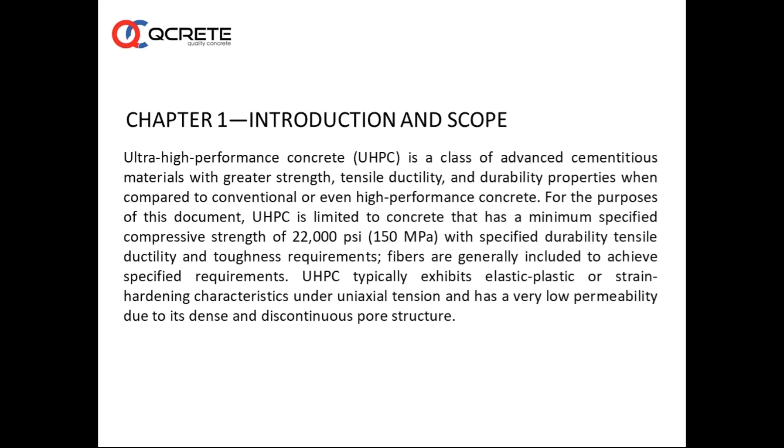UHPC typically exhibits elastic plastic or strain hardening characteristics under uniaxial tension and has a very low permeability and discontinuous pore structure. This is one of the important characterizations of ultra high performance concrete. It has almost negligible permeability. Ultra high performance concrete consists of cement, silica fume, fine quartz sand, high range water reducing admixtures, and fibers with water binder ratios probably between 0.15 to 0.25.

And many times, a lot of variations in UHPC matrices have been developed that contain other supplementary cementitious materials and sometimes coarse aggregate. Normally, whenever we talk of ultra high performance concrete, generally very fine materials are introduced in the body of concrete to make such kind of concrete. However, sometimes 8 mm down aggregates with quartz sand or silica sand are introduced to make such concretes. But in general, ultra high performance concrete consists of Portland cement, silica fume, and very fine particles of sand.

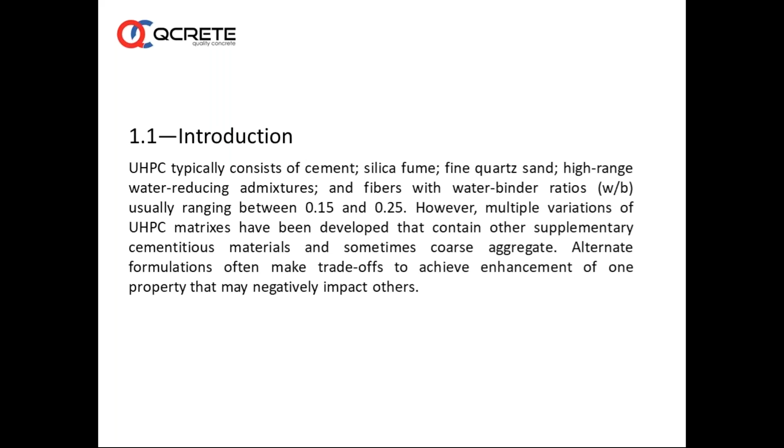And here we can say silica fume plays a major role in bringing higher and higher strength and higher performance into the concrete matrix. We have seldom seen much literature on ultra high performance concrete without silica fume. Most of the work across the globe on ultra high performance concrete is done with silica fume, and very rarely we see products like metakaolin, or in combination with silica fume, some metals replacing it to some extent. So basically, these are the components of ultra high performance concrete.

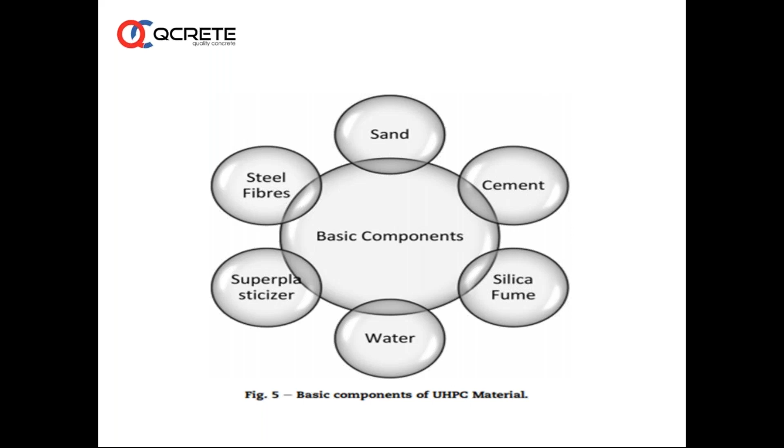So the most important characteristic of ultra high performance concrete is its homogeneity, and this homogeneity is enhanced by eliminating coarse aggregates. If you have a lot of coarse aggregates of different sizes, like in the case of normal concrete, the homogeneity may be lost. That is the reason the shift is towards finer particles, which can be packed well and which will give enhanced performance. Density enhancement is by optimization of the packing density of the matrix. This is achieved through optimizing gradation and mixture proportions between the main matrix constituents.

Ductility enhancement is done by introduction of fibers. As the matrix is very brittle, fiber reinforcement is added to obtain elastic-plastic or strain hardening behavior in tension. Typically, UHPC has fiber contents of about 2% or more by volume. The maximum fiber content is a function of the fiber aspect ratio and fiber shape, as well as production issues such as workability. So addition of fibers, basically steel fibers, brings the other dimension in the case of UHPC as far as ductility is concerned. The fibers are basically steel fibers, and there are cases where we find combinations of steel fibers and other fibers. We will talk about that.

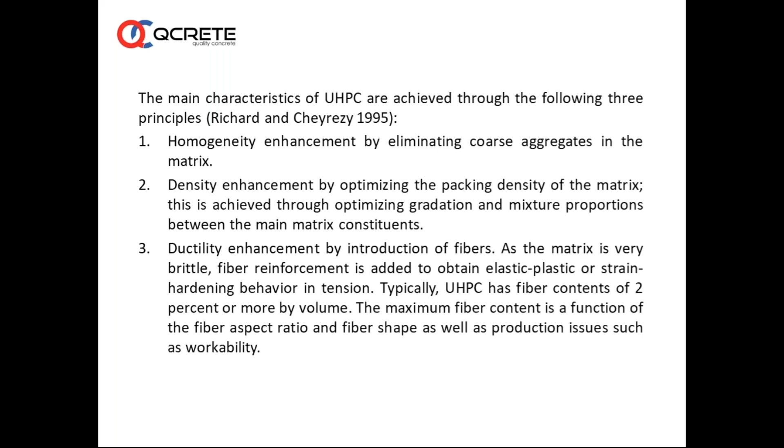UHPC, how it has evolved, how it has developed, we are going to have a very brief review of these things. Now, first we will talk about modern concrete. As a part of history, Joseph Aspdin introduced this wonderful material called cement. After that, normal concretes came into existence, and we have been using normal concretes for almost a century. Then we started using concretes with superplasticizers, that is free flow concrete, high flow concretes, self-compacting concretes. And then, as a final stage in this kind of evolution, we have moved towards ultra high performance concretes. In ultra high performance concrete itself, a lot of innovations have been made by different researchers, and different applications of these materials have also been found.

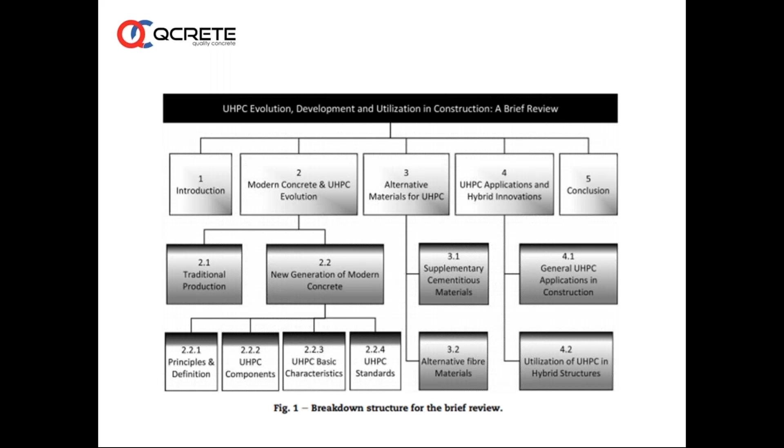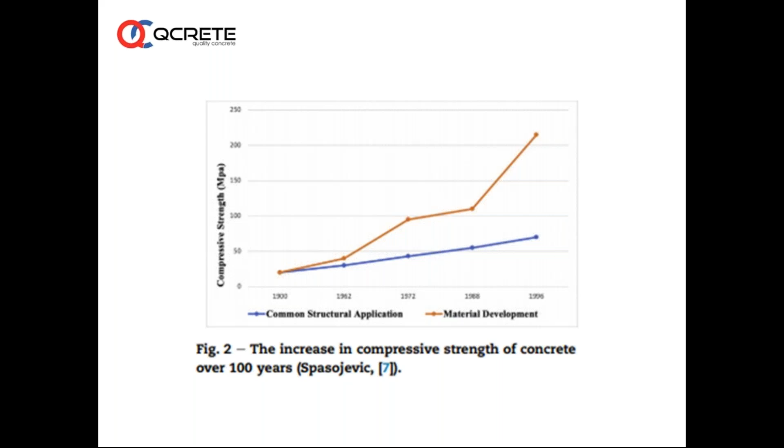The common applications now, for example, if we talk about India, I can say clearly 70 to 80% falls under M20, M25 or maximum M30, even if we are doing self-compacting concrete and such concretes, the strengths are not very high. You can see all over the world the strengths actually available are at this level, but applications are at this level. So as I said in my introductory remark, we are in infancy as far as the utilization of ultra high performance concrete is concerned, at least within the geographical boundaries of our country.

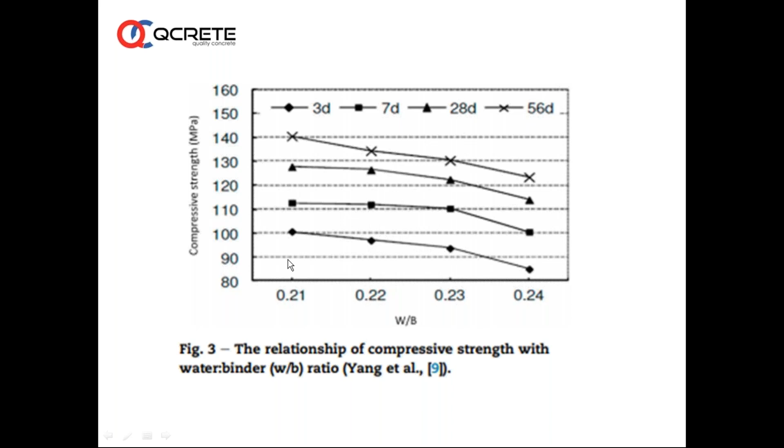Now, the major difference is the packing. Actually, in conventional concretes you have materials ranging from 20 mm, 12 mm, different sizes of sand, and then cement, things like that. Whereas in ultra high performance concrete, you have cement, microsilica or silica fume, packed well between finer particles, and the size of the inert fillers, for example sand, is very low. It can be between 0.1 to some nanometers.

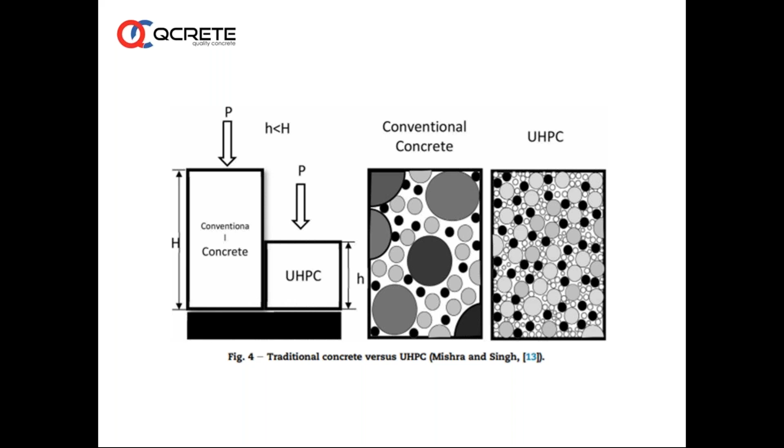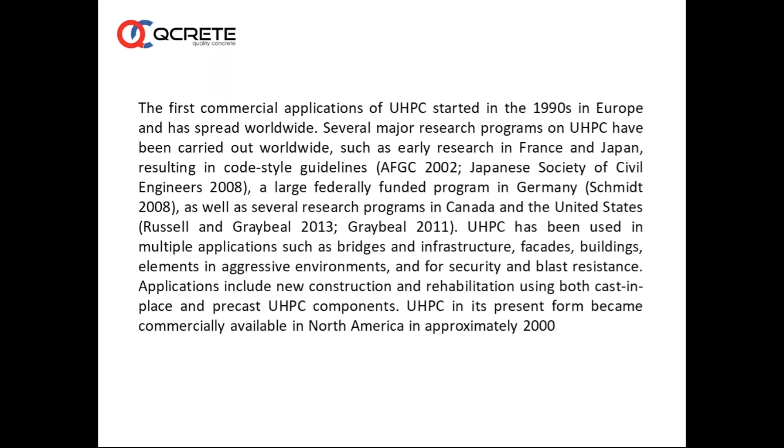The first commercial applications of UHPC started in the 1990s in Europe and have spread worldwide. Several major research programs on UHPC have been carried out worldwide: the Japanese Society of Civil Engineers, a large federally funded program in Germany, as well as several research programs in Canada and the United States. UHPC has been used in multiple applications such as small bridges, infrastructure, building facades, elements in aggressive environments, and for security and blast resistance. Applications include new construction and rehabilitation using both cast-in-place and precast UHPC components. UHPC in its present form became commercially available in North America approximately in 2000.

UHPC is still in the process of finding broader use. The objective of this report is to introduce UHPC through a brief overview of production, properties, design, and applications, and to promote further use of UHPC and integration into today's construction market. Because the cost of UHPC is high compared to conventional concrete, use should be focused towards applications that engage several of the exceptional properties of the material. Current research needs have been identified as improved design guidance, standardization, and broader material knowledge.

So, for example, the most important aspect here is actually cost, especially as far as the Indian concrete market is concerned, a very highly price sensitive market where people bargain and talk a lot about the money for M25 concrete. And if you're talking about a UHPC concrete which can last for 100 years or 150 years or 200 years, many people do not appreciate the life cycle costs of the concrete and the low maintenance costs it can bring in. So many times the initial application cost becomes vital, and hence many projects do not take off with UHPC.

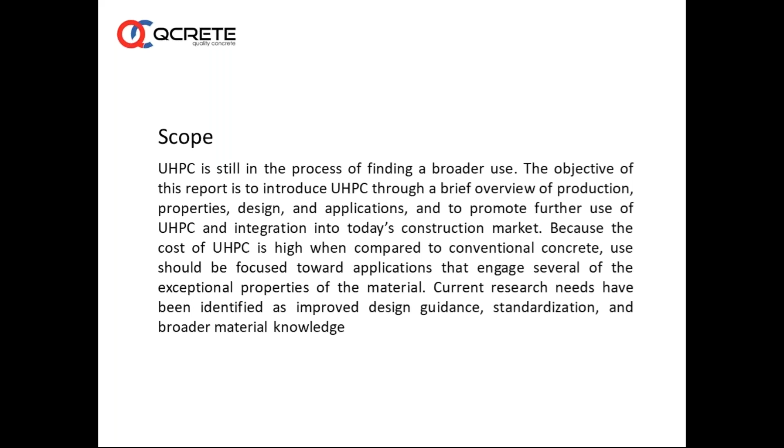The materials used to make ultra high performance concrete are similar to those commonly found in traditional concrete, and UHPC materials are selected based on their particle size to optimally pack the matrix to reduce voids between the particles. While some commercially available UHPC mixtures are proprietary, with their exact composition not reported, other mixture compositions are readily available. Some mixtures feature less common components such as silica flour, which is silica sand ground to achieve a specific particle size. The addition of high-strength steel fibers to the matrix results in improved ductility and the ability to eliminate some of the mild steel reinforcement normally found in conventional reinforced concrete members.

Here, generally, how UHPC can be done, a lot of work has been done, it is available, and we can take this as a starting point, but our interest and intelligence should be to use the locally available raw materials. There are a lot of companies abroad, in Germany, the US, etc., who have probably achieved very great things in terms of extraordinarily characterized UHPC mixtures which are proprietary, meaning they don't tell what they have done to achieve such mixes. It is proprietary, but general mixes as a starting point for a concrete technologist or researcher are easily available.

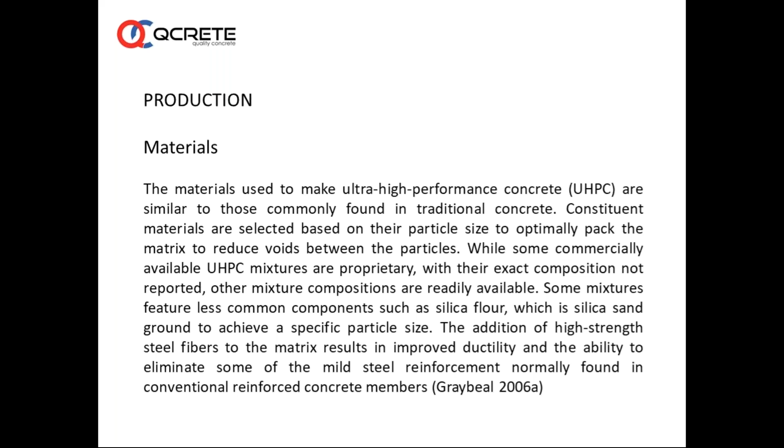The high strength and superior performance achieved with UHPC stem from reduction of void space in the matrix and a discontinuous pore structure, depending more on the material's behavior on a microscopic level than on the properties of its constituent components. Through the proper selection of components based on both their particle size and mechanical properties, the number of contact points between particles is increased, which in turn causes the level of stress transferred between particles through the paste to be reduced. So mixture proportioning of UHPC is not like conventional mix design or mix proportioning.

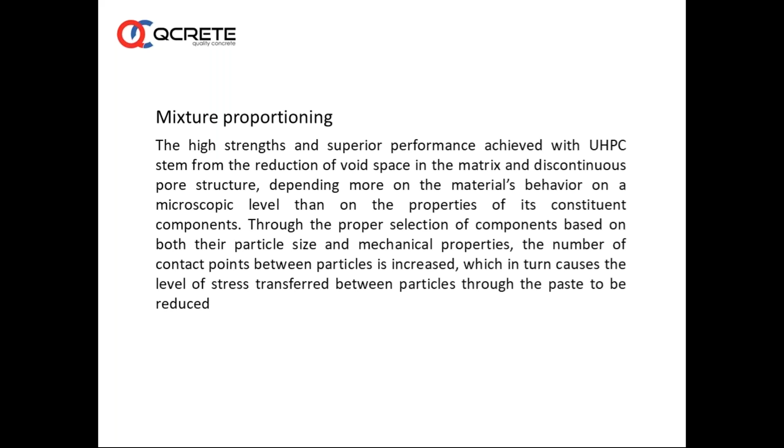You can say this is the next level of science where particle packing and packing density are given importance, and there are a lot of software algorithms developed by some companies which are, you can say, proprietary or secretive in nature, to achieve ultra high performance characteristics with the locally available materials.

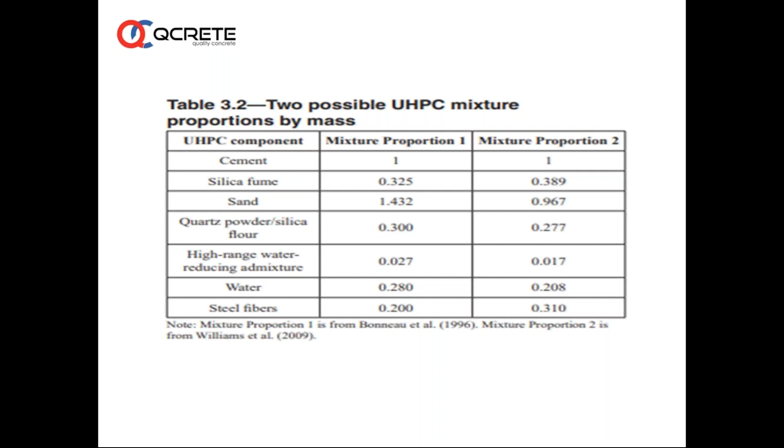So this is from ACI, where they have given two possible UHPC mixture proportions, and you can see here a huge amount of silica fume, which, as we discussed earlier, has become part and parcel of these kind of mixtures. And you have sand, quartz powder, high range water reducing admixture, water and steel fibers. So these two have been given, and these can be used as starting points for making ultra high performance mixtures using the locally available materials.

In fact, UHPC is a new form of concrete with a new type of composite construction material. Its high compressive strength and ductility are achieved by an optimized packing of fine and ultra-fine particles as well as the inclusion of steel fibers. This optimization in particular will evenly distribute all particles at the micro scale to pack the spaces surrounded by larger particles. Accordingly, a dense matrix is achieved with low permeability to provide a concrete with superior properties.

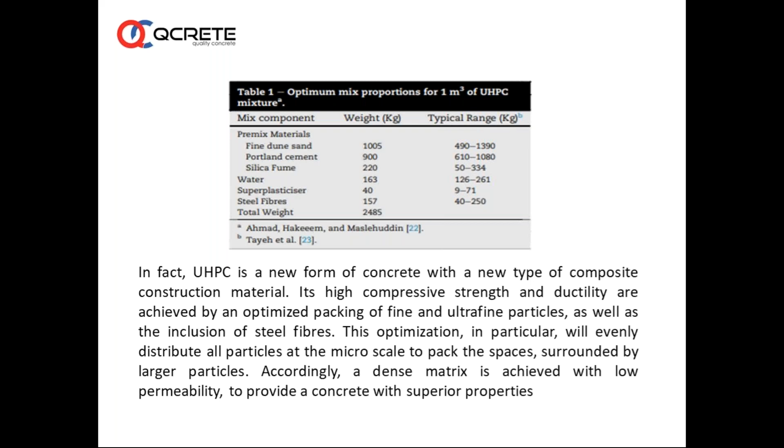Different definitions have been given to UHPC. Some researchers define the term based on its major components. For example, Farzad defines UHPC as cement-based material formed with an enhanced gradation of granular components, a water to cementitious materials ratio of less than 0.2, and a significant portion of internal fibers. Mishra and Singh defined UHPC as a special type of concrete that consists of highly fine-grained reactive admixtures, silica fume and fine quartz, fibers, and superplasticizer, while having more binder content and low water binder ratio. Azmee and Shafiq defined the term as fiber reinforced superplasticizer silica fume cement mixture with a very low water to cement ratio, characterized by the presence of very fine quartz sand that ranges from 0.15 to 0.6 mm in diameter instead of ordinary aggregate. So the definitions are different

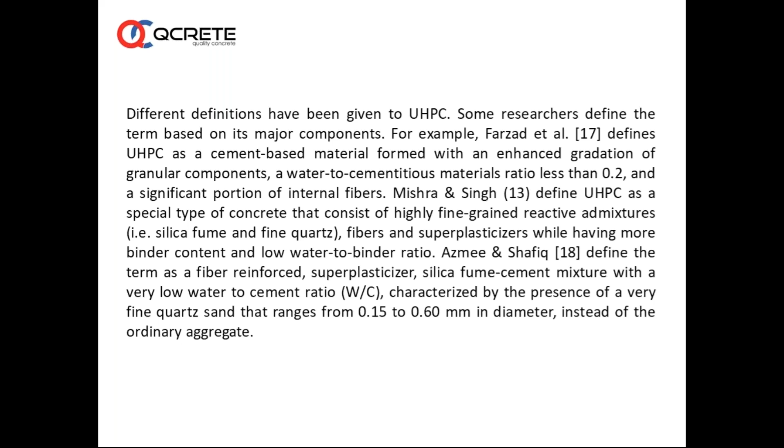as given by different people here, and we need to know that at this moment it is completely different when compared to conventional concrete, and achieving the required properties with different locally available materials will require a lot of detailed study of material characteristics, particle packing, and detailed study of all the sources of different materials and their properties. Ahmad again defines UHPC as a mixture produced by using high contents of cement, silica fume 0.1 to 1 micrometer, and superplasticizer along with very fine quartz sand, quartz powder, and fibers without coarse aggregate.

So you can see different people defining it in their own way actually. For example, Aroraa defines UHPC as a multi-scale microstructure designed material tailored for very high compressive strength, high flexural and tensile strength, high ductility. Another defines the term as an innovative composite material that can serve as a potential candidate for concrete structures exposed to aggressive environment. This is the most important point actually. The resistance to chemicals, resistance to aggressive environment is enhanced significantly when we are talking about UHPC. The durability also is improved proportionately.

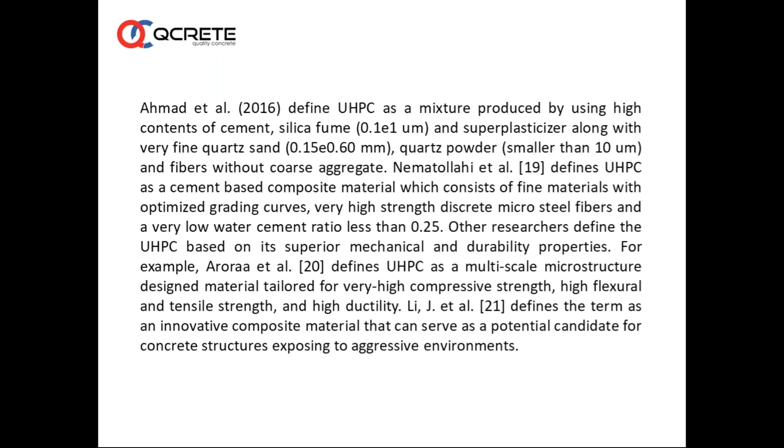The matrix of UHPC is optimized for particle packing, that is, the mixture proportions of typical components such as sand, silica fume, and cement are optimized to achieve the densest packing possible, as investigated by de Larrard and Sedran. Another unique aspect of UHPC is that some cementitious material particles may not take part in the hydration process, but merely serve as fine aggregate in the overall matrix. It is common for 30 to 50% of the cement to be hydrated in UHPC due to the lower water content. So, due to the lower amount of water available, as we are using a very low water cement ratio, some of the cementitious products may remain unreacted in the body of concrete, and they can remain forever in that state.

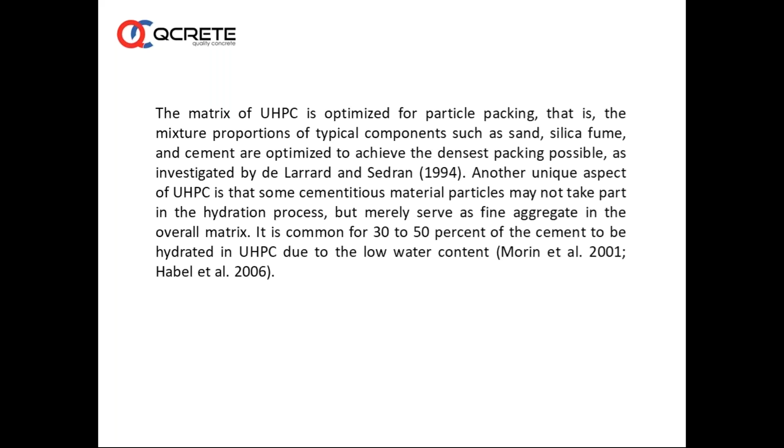We could come up with a definition which combines UHPC major component and superior properties along with the basic technologies behind the UHPC production. Thus, UHPC is a new generation of cement-based construction material tailored for very high compressive strength, high ductility, sustainability based on micro-scale optimization of fine and ultra-fine aggregates, lower water to cement ratio with added superplasticizer and reinforcement with high strength steel fibers.

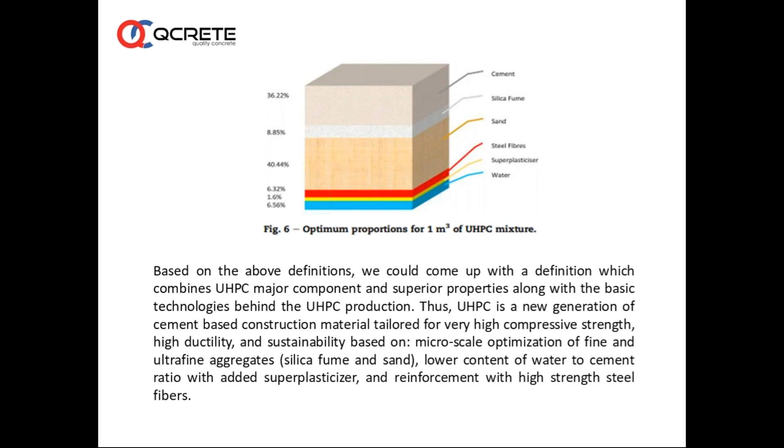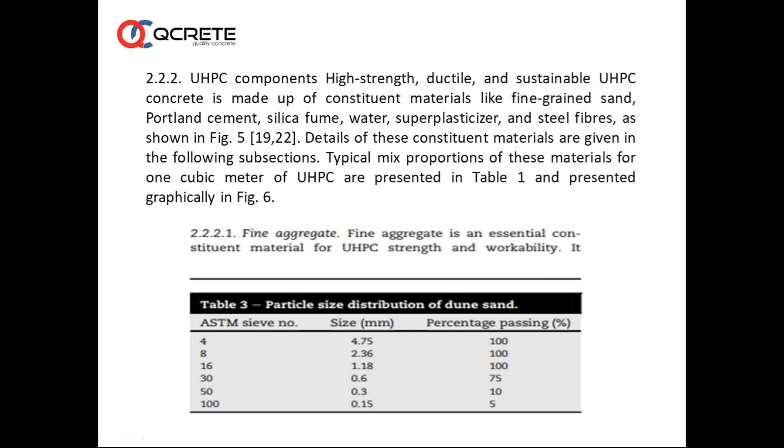So you can see here one of the particle size distribution requirements made by one of the scientists actually. Silica sand is expensive for UHPC. Quartz sand, on the other hand, is available, but it needs to be crushed from coarse aggregates or natural rocks. Natural sand, in contrast, can be used easily and effectively as a fine aggregate for UHPC. And in Saudi Arabia, they have used dune sand, which is easily available.

And this also shows some research on the relationship between compressive strength and silica fume content. As the silica fume content goes up to 15% here, the compressive strength breaches the mark of 110, 120, which is required for UHPC. That is why silica fume has almost become an integral part of UHPC.

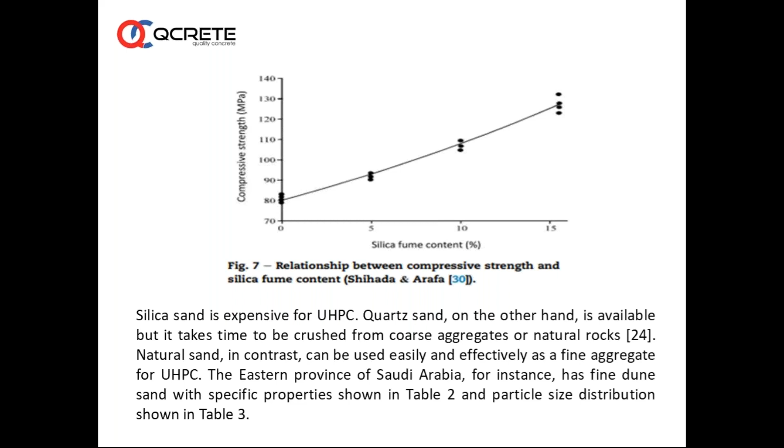Portland cement. Ordinary Portland cement is the primary binding material. When used with water, it hydrates and becomes solid and binds all aggregates of the UHPC concrete. It is produced mainly from two basic raw materials. We know all these things actually, which are basic, but the content that is used in ordinary concrete cannot be compared with this one. Almost you have double the cement content in the UHPC.

The part of the cement that is not hydrated due to the small proportion of water will be used with other aggregates for packing optimization. So from a common man's point of view, cement being used as a packing material is unheard of, but in UHPC, if a lot of material is unhydrated, it will be working as an inert filler and it will be filling up the spaces between the larger particles, and it participates in packing optimization.

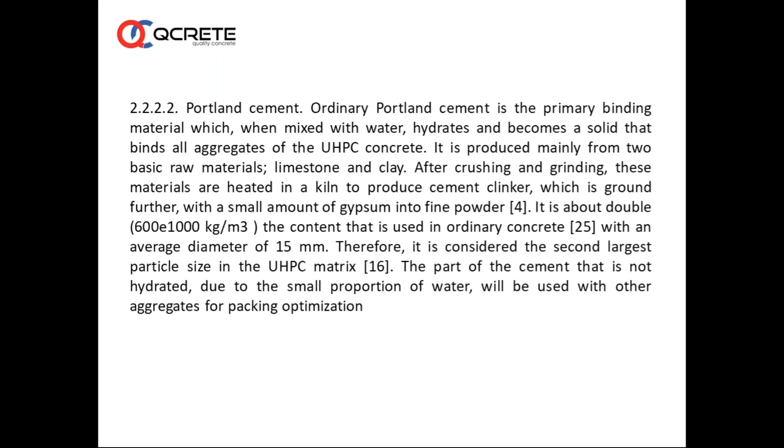We have spoken a lot about silica fume so far. Silica fume or microsilica is a waste byproduct material coming from furnace smoke of the production of silicon metal and ferrosilicon alloys. The rounded particles of silica fume have a diameter of 0.15 micrometers on average, and most of the particles are less than 1 micrometer. Thus, they are the smallest particles in the UHPC matrix, 100 times smaller than cement particles. This is why it is considered an excellent filler to fill the voids between larger particles in the UHPC matrix. Using this ultrafine material leads to a dense matrix which enhances the mechanical and durability properties of the concrete.

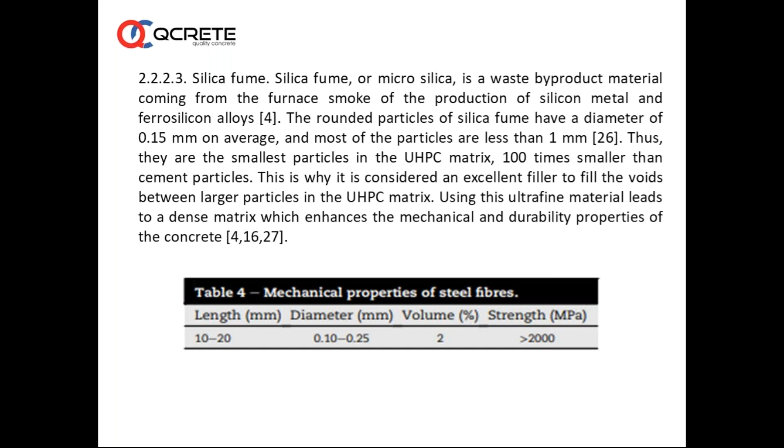So microsilica, because of its shape and size, acts as a filler. Also, it reacts with the other hydration products, making durable, high strength and extraordinary concrete as the amount of microsilica goes up in the matrix. So silica fume can be used in UHPC mixtures within a range of 150 to 250 kg, which is huge compared to a conventional concrete. In conventional concrete, we are all aware microsilica is used between 5 to maximum 6 or 7% normally. So here it is used between 10 to 30%.

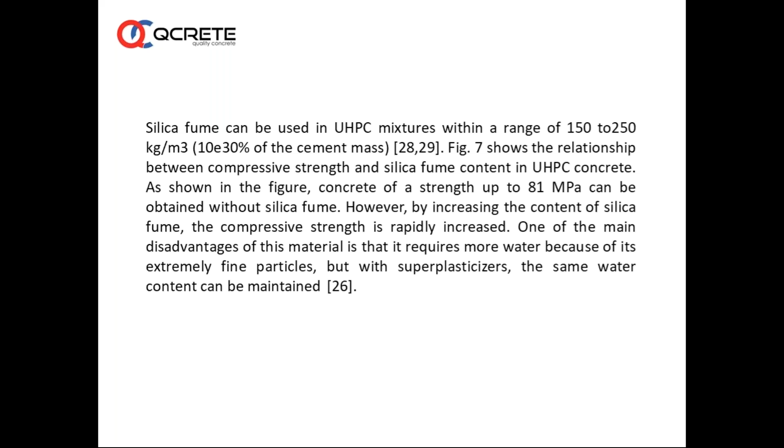But the advantages are plenty. Even though you can make concrete without microsilica and get some high strength, many times in our experience, we can say microsilica is like an insurance. Whatever happens, if some mistakes happen during production or during transportation, microsilica will take care of that and give additional strength, as a strength boosting material as the age goes on, and at 28 days and beyond it will also improve the strength. It is a material accepted worldwide for use in high strength concrete and also ultra high performance concrete. So even though it requires more water or more admixture, it is a product which is used worldwide wherever high strength, high chemical resistance, low RCPT values are required.

Water is an essential material for making UHPC. Potable water is suitable, as is usually used for ordinary concrete. The quantity of water must be enough to complete the hydration process and to maintain workability. The minimum water to cement ratio for ordinary concrete is about 0.4 to 0.5, including water for workability. The amount of water is inversely proportional to the compressive strength.

If water increases, the strength decreases. Excess water not used in hydration would develop voids in the concrete mixture, which would increase permeability and reduce the strength of concrete. In UHPC technology, using a high-range water-reducing admixture helps to maintain workability without the need for excess water. Accordingly, the water-cement ratio will be reduced to an optimum level ranging from 0.14 to 0.22. This leads to increased compressive strength. So 0.14 to 0.22 are earlier unheard-of water-cement ratios, but in UHPCs we use 0.14 to 0.22.

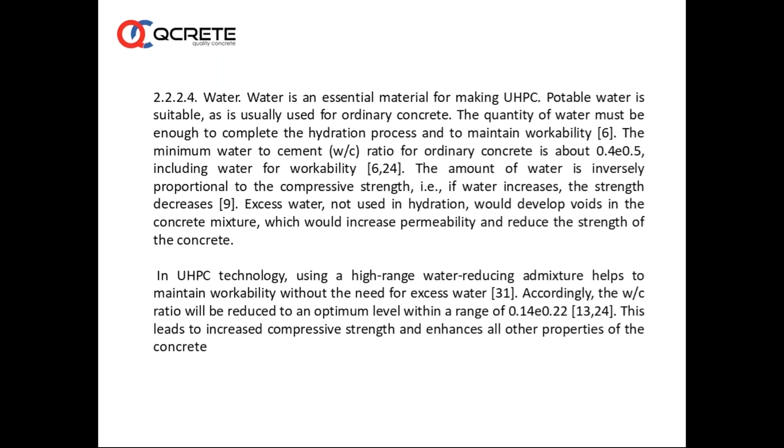In UHPC, you use high range water reducing admixture. Now, polycarboxylate ether based admixtures are available. Extremely advanced admixtures are available, which can be used in very high dosages without affecting the setting time of concrete. Even at very high dosages, these admixtures are tailor-made in such a way that they don't disturb the hydration process or setting time, and hence they are part and parcel of ultra high performance concrete.

The reduction of water cement ratio to 0.14 to 0.22 is possible only because of such extraordinary water reducing capabilities of polycarboxylate ether based materials or polycarboxylates.

Concrete without reinforcement is liable to fracture since it is brittle in nature and cracks cannot be stopped. Therefore, steel fibers are used to reinforce the UHPC matrix to provide better resistance towards crack generation, a better tensile strength and resistance to fracture. Steel fibers are characterized by their shape, diameter, volume, orientation, and strength. The mechanical properties of steel fibers are also there.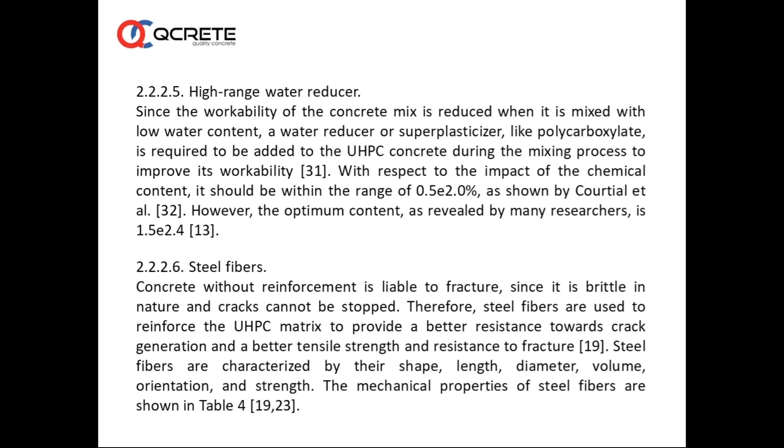Deformed fibers such as hooked end fibers are much better than straight ones. Also, long fibers are better than short ones. With respect to the fiber's volume, an increase will improve ductility up to a certain limit, beyond which additional content will not be beneficial. A content of 1 to 2% of the expensive fibers has been proved to be enough to achieve the required properties with wise economy. Also, fibers with a good orientation along the direction of the tensile load lead to good homogeneous distribution of fibers, which will improve the mechanical properties of concrete.

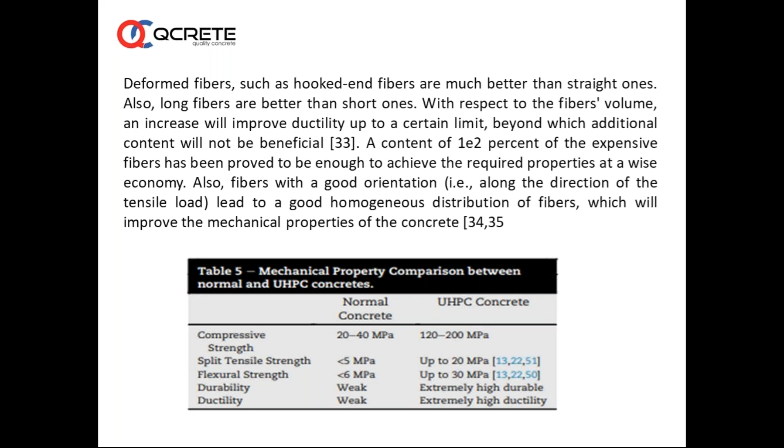Supplementary cementitious material. What is the role? We know when you are using fly ash, workability and setting time are increased, and heat of hydration is reduced. GGBS also increases workability, silica fume decreases it. Hardened property strength is increased when you are using all these materials, and permeability is reduced; when you are using silica fume, maximum reduction takes place. Chloride ion resistance and sulfate ion resistance are enhanced significantly, and if you look at the particle size, silica fume is the smallest particle.

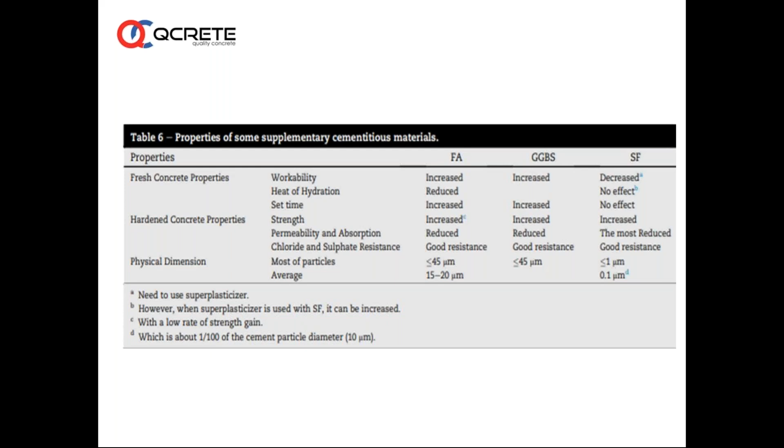Whenever we are using supplementary cementitious materials, and since they are part and parcel of ultra high performance concrete, the overall durability, that means characteristics such as permeability as measured by DIN 1048, chloride ion resistance as measured by ASTM C1202, resistance to sulfates, drying shrinkage, abrasion resistance, freeze thaw resistance, long-term durability, long-term strengths, all are improved by introduction of these materials along with a containment of water cement ratio to less than around 0.21.

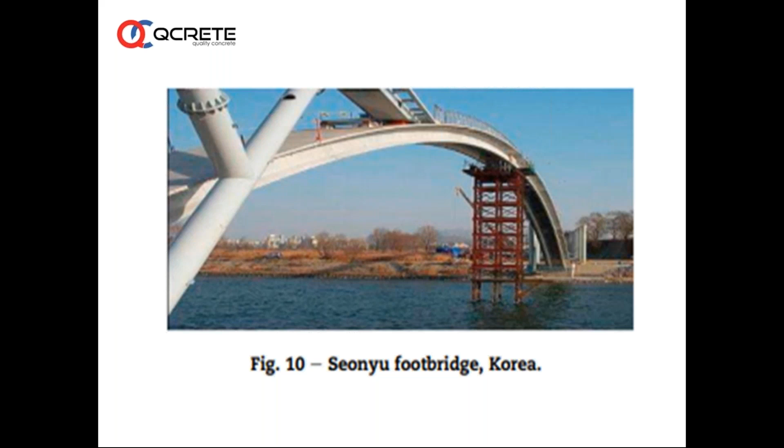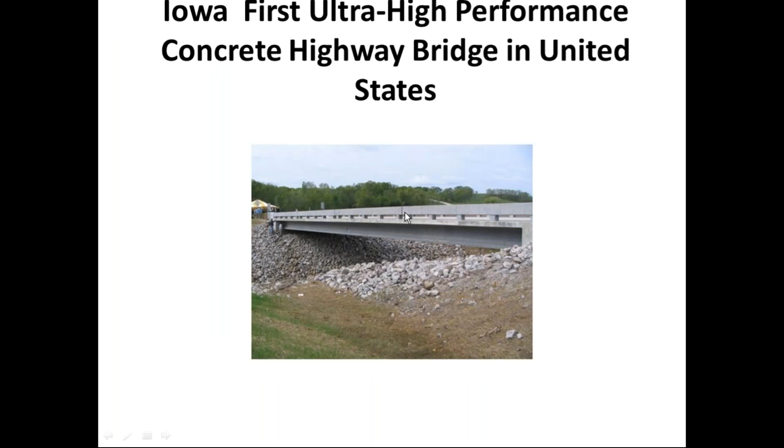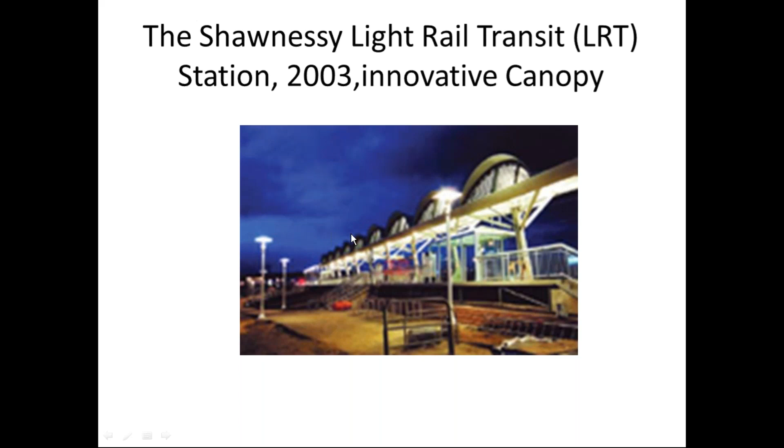So has UHPC already been used somewhere? Yes, there are a lot of examples. A footbridge in Korea. This is the first ultra high performance concrete highway bridge in USA, with approximately 120 MPa strength. Again, a Shawnessy light rail transit system in the US. A very innovative canopy has been made by using this ultra high performance concrete. And you have a lot of other applications that can be done by using ultra high performance concretes.

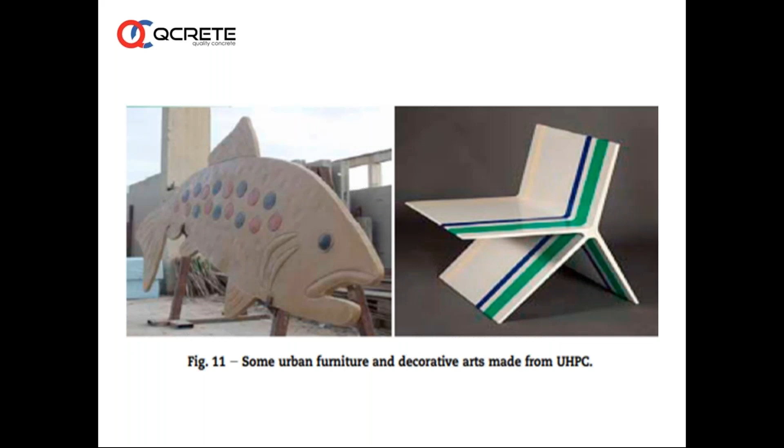You can reduce the thickness of structures. You can reduce the column thickness. You can reduce the steel. You can really take the reinforced construction to the next level by using UHPC.

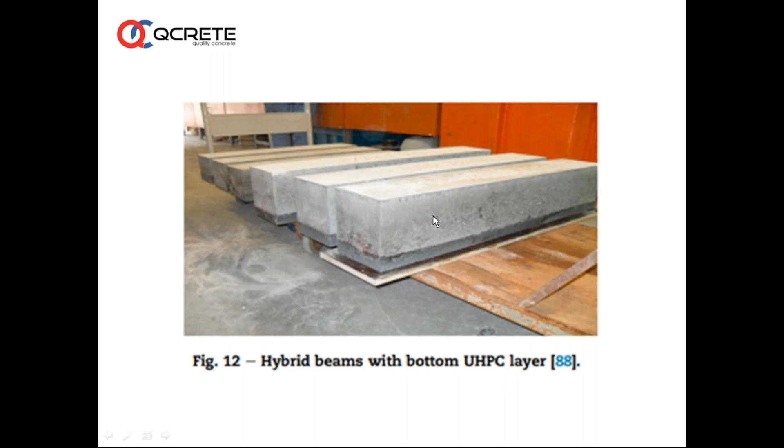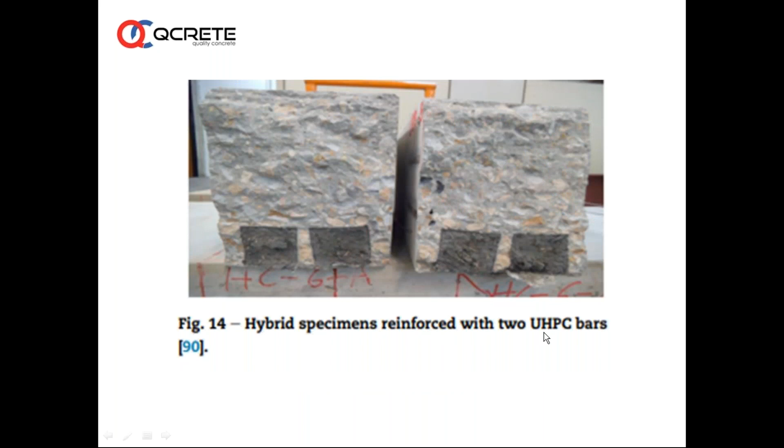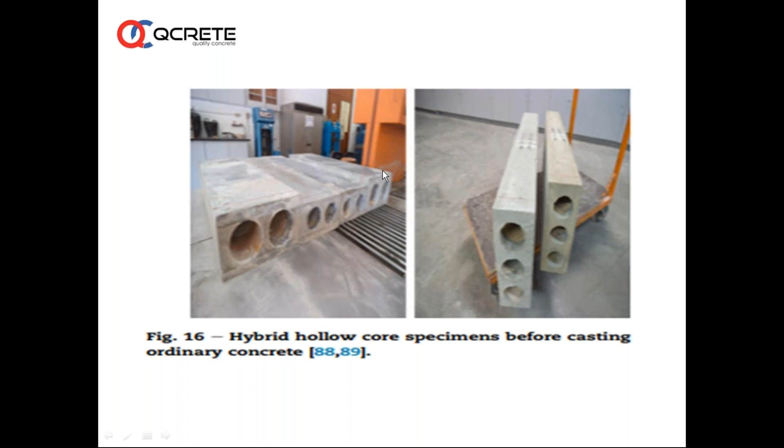Hybrid beams, some people have attempted hybrid beams with a bottom layer of UHPC and then on the top high strength concrete, and somebody has attempted UHPC bars which can be embedded in concrete. Hybrid specimens reinforced with 2 UHPC bars. Hybrid hollow core specimens before casting ordinary concrete. You can see it is already cast, and then on top of it they will cast the normal concrete.

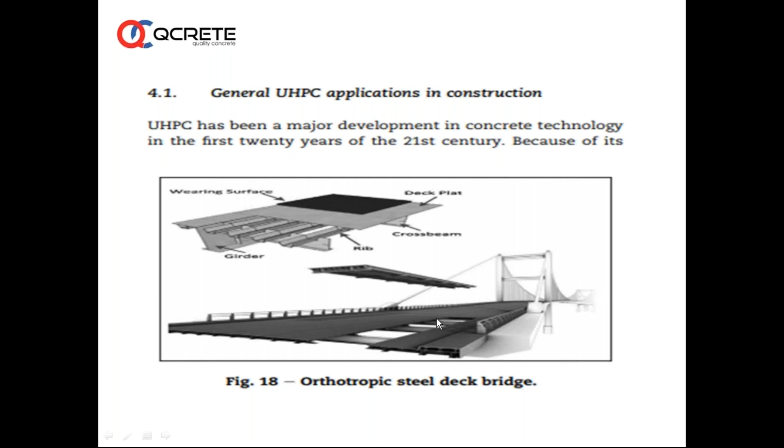UHPC has been a major development in concrete technology in the first 20 years of the 21st century. A bridge deck, you can see, for using UHPC as a repair material. People have investigated UHPC as a repair material. The interfacial bond and the permeability characteristics were evaluated. The results showed that the behavior of the composite was firm and stable due to the UHPC overlay.

So bridge decks, repairing of old bridge decks, have been done. The study revealed that UHPC was efficient and stable for concrete repair. Also, Roy used an effective mixture of UHPC as a repair material for normal concrete. The study was conducted to investigate the bond strength between UHPC and substrate of normal concrete. The study revealed that UHPC was effective for repairing deteriorated structures.

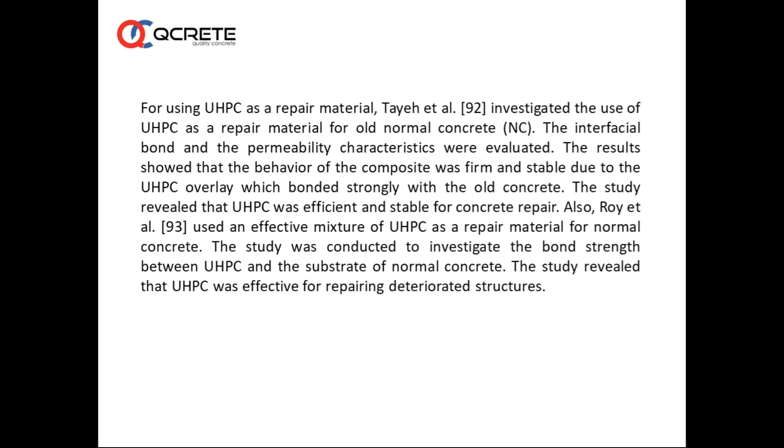Another utilization of UHPC in hybrid structures is in timber concrete composites. The two materials are bonded together either with mechanical fasteners or rigid connections. Their advantages are utilized in one composite to achieve better performance. Detailed reviews of this timber concrete composite, including its connection systems, were carried out.

Combining UHPC with wooden structures was also investigated by Ferrier. A hybrid beam was made of glued laminated wood and UHPC planks. The investigation showed that the use of UHPC was optimized with better performance and efficiency, based on greater bending stiffness and significant increase in structure capacity. With UHPC, it is possible to reduce the depth and to increase the span of the beam without affecting the structure's performance.

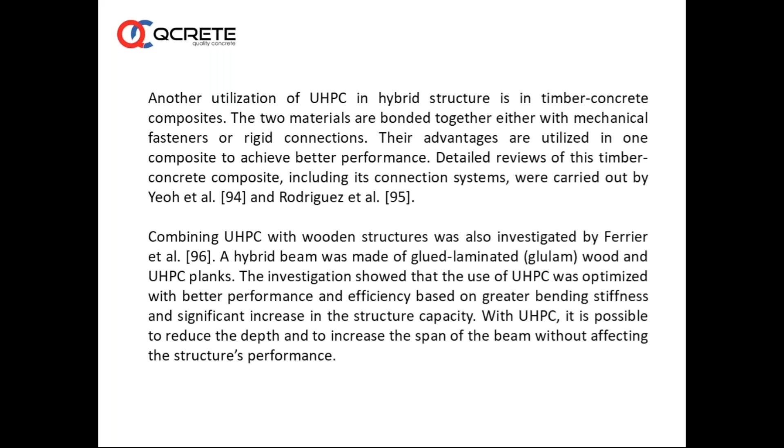Some people also studied the possibilities of using UHPC in timber concrete composite floor structures. They designed a composite consisting of a timber beam and a thin, lower weight UHPC deck. Since it is difficult to use mechanical joints, they proved that gluing is a good method to connect the two different materials. The study showed that the new type of composite would enable the design of a UHPC deck with a relatively small thickness.

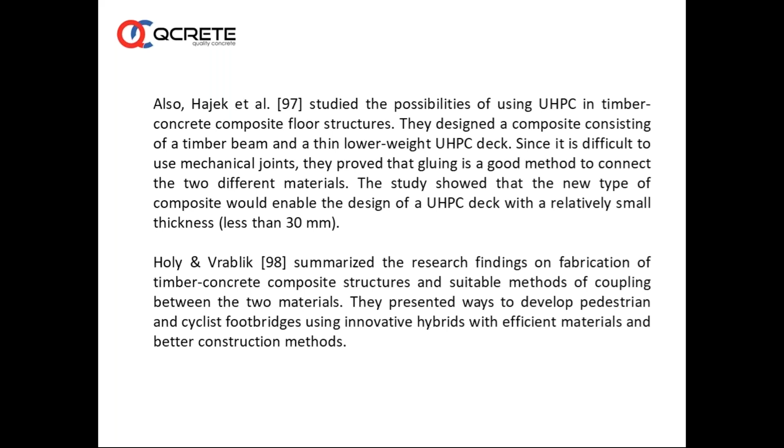And Holy and Vrablik summarized the research findings on fabrication of timber concrete composite structures and suitable methods of coupling between the two materials. They have presented ways to develop pedestrian and cyclist footbridges using innovative hybrids with efficient materials and better construction methods. Steel UHPC composite bridges also have been tried. It is a current field of application for UHPC, which attracts many researchers to investigate the composite structure.

Orthotropic steel deck, a steel plate covered by a roadway surface, is used widely in many types of bridges, especially in long span steel bridges, as already shown earlier. Despite having the advantages of lightweight and high load capacity, this type of structure suffers from cracks due to the fatigue problem under the load. Fatigue cracks are observed in many orthotropic steel deck bridges around the world, such as Severn Bridge in England, Sinntal Bridge in Germany, Westgate Bridge in Australia, and the Bridge of Leverkusen in Germany.

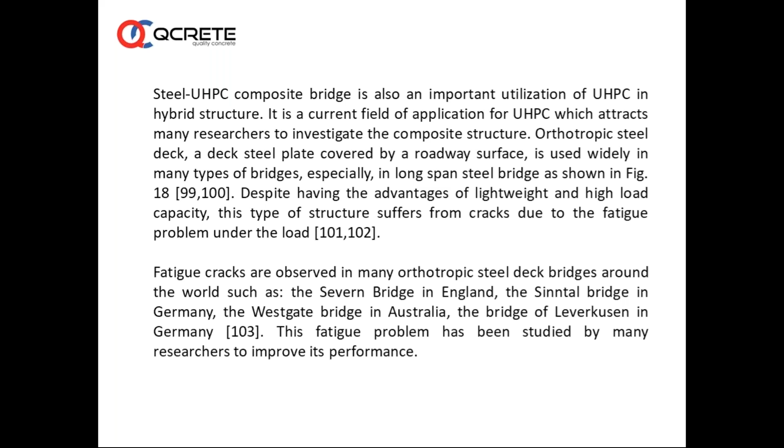The fatigue problem has been studied by many researchers to improve the performance. One of the best prospective solutions to resist this fatigue is to use a UHPC overlay as a deck pavement instead of the original pavement. Fatigue response of using UHPC overlay with orthotropic steel deck was studied by Zhu. The study showed that UHPC overlay can significantly reduce the magnitude of stress at the deck side. Also, the transversal bending behavior under the bending moments of the steel UHPC composite deck was studied by Luo. The study found that the UHPC overlay has a considerable effect on ultimate load capacity of the deck.

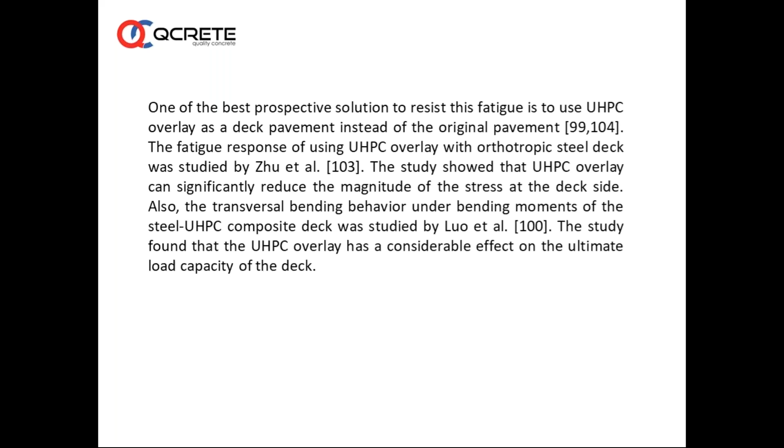The next is astonishing. It is 305 MPa compressive strength at 28 days. Flexural strength: you can see all these flexural strengths are significantly improved. The flexural strengths are very high when compared to normal concrete. You can see here the flexural strength is 45 MPa. Water cement ratio is 0.23. Porosity not measurable, permeability not measurable. Okay, mixing time is 5 to 6 minutes.

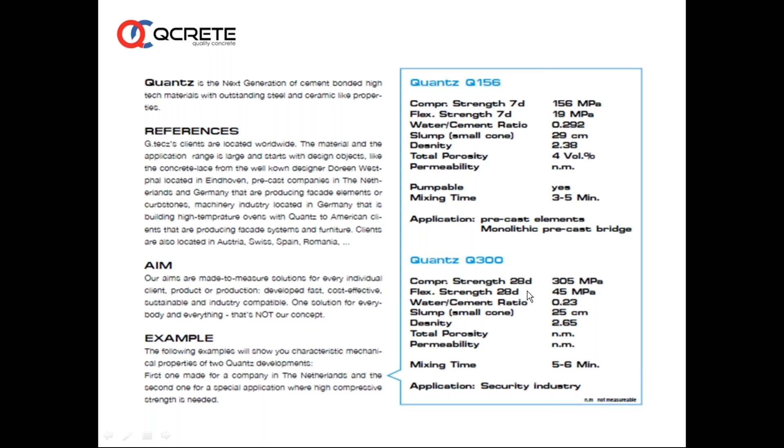So some companies abroad, like this company, have taken ultra high performance concrete to the next level, where they are talking about a strength of 305 MPa, 300 MPa. And you can see here this product, ultra high performance concrete, where they are talking about 28 day strength of 80 to 300, 56 is 100 to 300, flexural strength is around 25, density has moved up.

Most importantly, permeability not measurable, water absorption coefficient not measurable. So this is a totally different shift in the material performance. Ultra high performance itself, the technology is taken to the next level by some patented technologies.

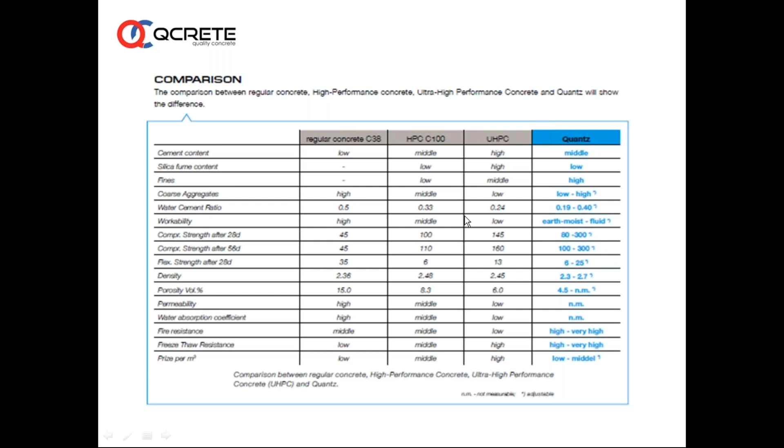Another example where normal curing, the strength is 128, 153. So here we should not compare with the strengths that we get by cubes. It is cylindrical strengths actually. So if you convert this to cube strength, it is higher actually.

So you can see the capillary pores are less, shrinkage is less, and then creep is less, carbonation normal, sulfate resistance no damages. So fire resistance also is given, means the product has been defined and designed for even high fire resistance.

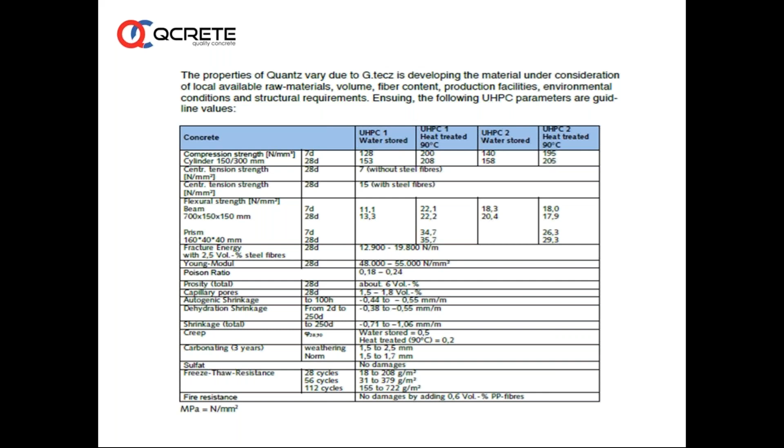So developed with local raw materials, perfect workability, earth moist to self-compact, means low to very high slumps are available, customized compressive strength, customized flexural strength, cost effective, sustainable, worldwide available.

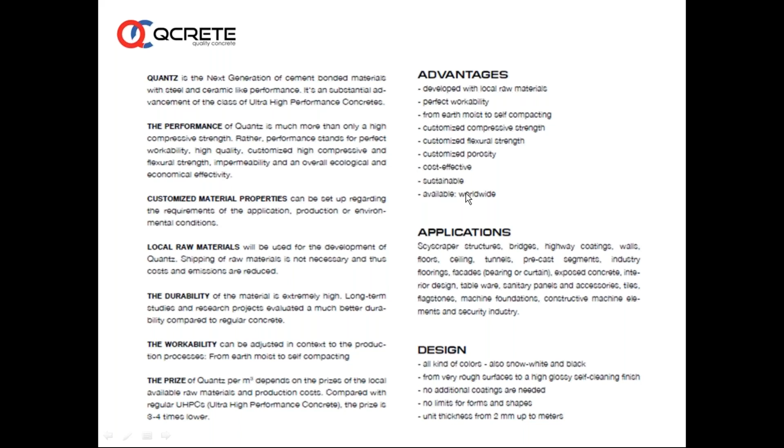So here the high performance concrete, what they're talking about is 250 to 500 MPa is possible, and you can see here the normal range, and then they can go up to this kind of strengths actually, tensile strengths, flexural strengths. You can make highly durable tile-like structures.

Carbonation is less. Chloride ion diffusion not measurable. Water resistance not measurable because it is an extraordinary material, a different material, and the normal available standards cannot give the values for such an advanced material. Fire resistance,

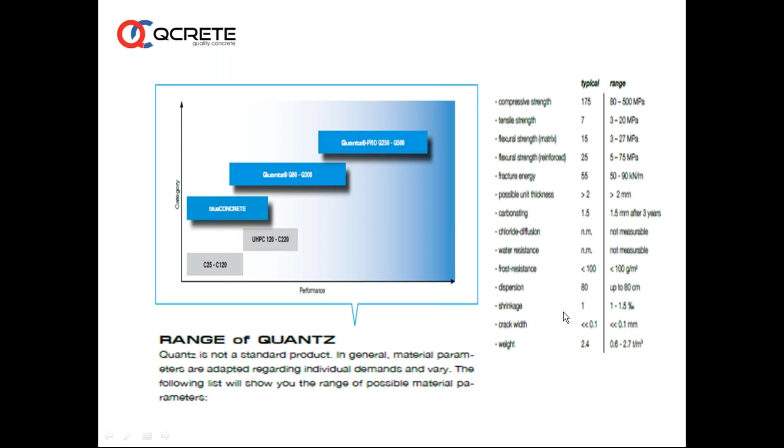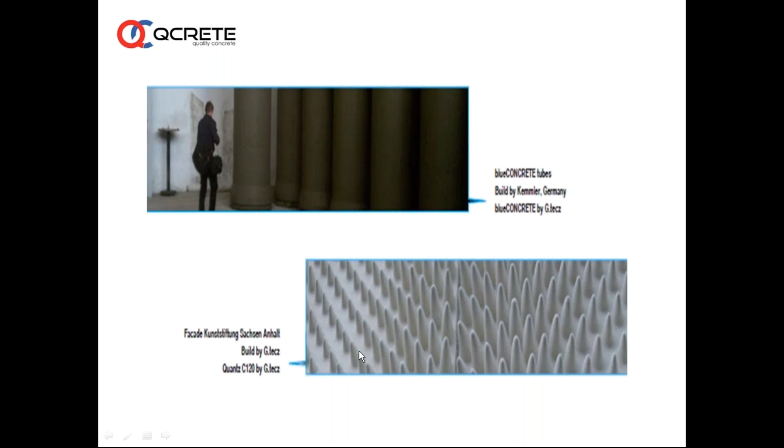so we can see some of the structures done. It is a facade where 120 MPa concrete is done, and this is a material for facade. A bridge has been constructed in Germany by using UHPC 150 MPa concrete, and you can see the steps in a house. It looks beautifully done, aesthetically pleasing architectural design using ultra high performance concrete.

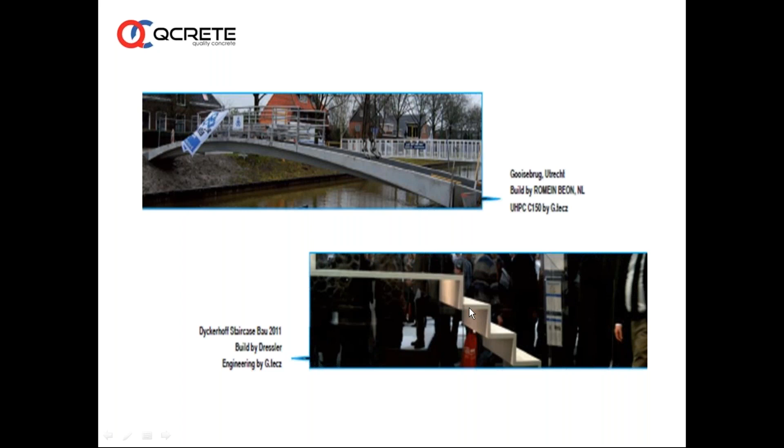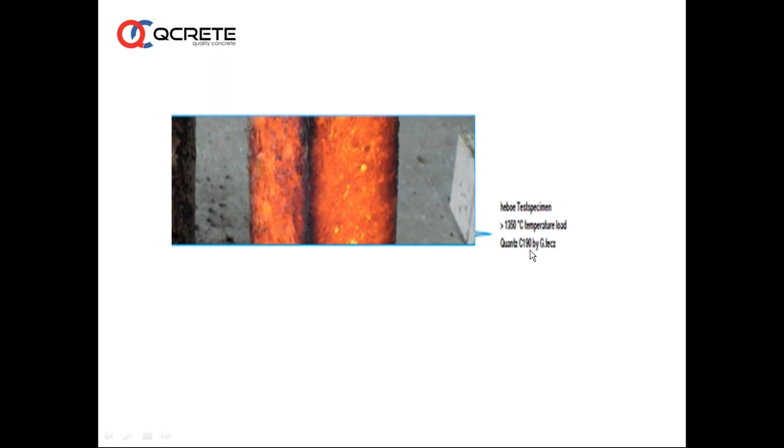So, conclusion: the new generation concrete has an amazing level of qualities that had never been thought possible before, and we can really harness the potential of this material for building high-rise structures, not only high-rise structures, but many other normal structures also, where we can reduce the thickness, increase the aestheticity, increase the architectural look, and can be used

in myriad ways. The mechanical properties of the new generation of concrete are greatly superior to the properties of conventional concrete. These incomparable values are a function of water to binder ratio, ultrafine powders, optimized packing of particles, method of curing, and microstructural reinforcement. With this technology, it is possible to construct structures beyond usual designs, which are lighter, larger, with longer span. Its special workability enables the fresh concrete to be cast in irregular or very slender shapes to form structures with aesthetic appearance or extraordinary finish.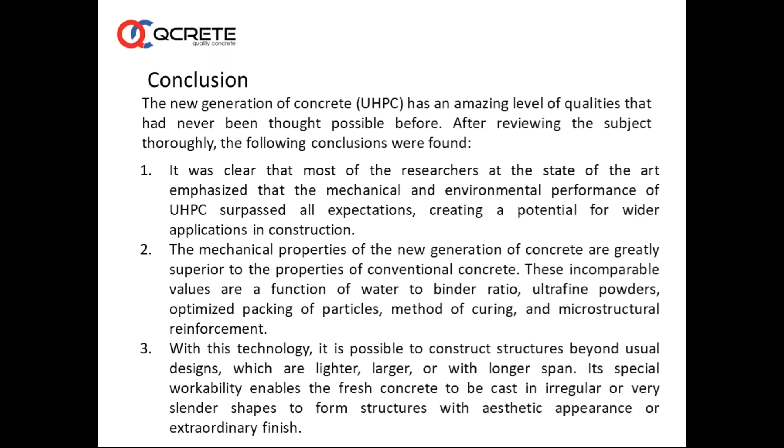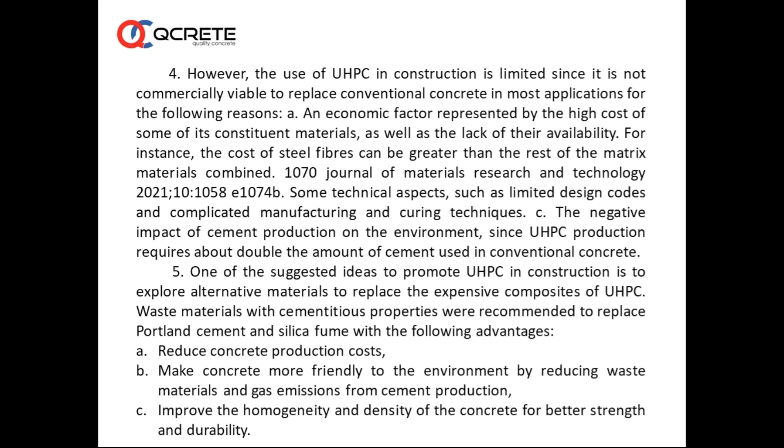However, the use of UHPC in construction is limited since it is not commercially viable, but researchers are working around the globe to reduce the cost, and days are not far off when it will become easily acceptable as far as the costing is concerned. One of the suggested ideas to promote UHPC in construction is to explore alternative materials to replace the expensive composites of UHPC. Waste materials with cementitious properties were recommended to replace Portland cement and silica fume with the following advantages: reduce concrete production costs, make concrete more friendly to the environment, improve the homogeneity and density of the concrete for better strength and durability.